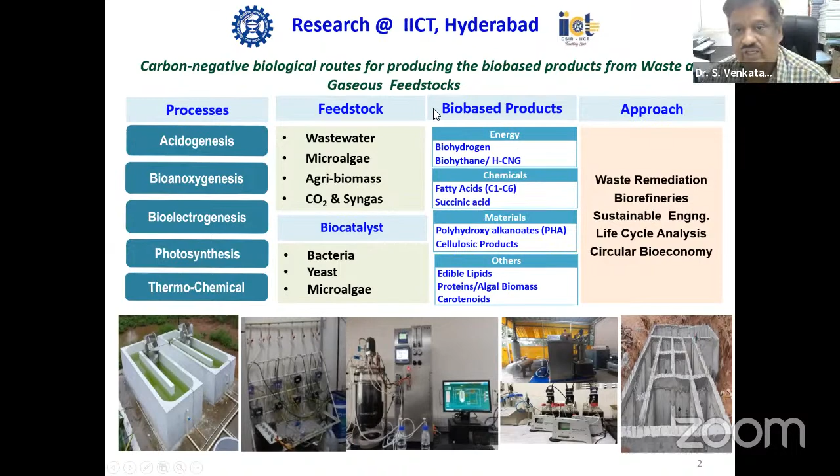We look into circular bioeconomy as an enabler by taking support from life cycle analysis as well as developing biorefineries, which are some of the things I would like to explain in this presentation. So this is the overview of my presentation.

I would like to speak on climate change, why climate change needs to be considered very seriously. I'll try to discuss fossils versus circular economy, which is again a very important entity that needs to be infused into the economic system, and discuss nature-based solutions, why we have to use nature-based solutions for sustainable development, and a few examples which we are doing in IICT. And finally, I would like to conclude by showing some of the models which we have developed and the models which can be taken up for development in future.

As far as the global energy mix is concerned, mostly we are going with fossil-based feedstock for energy requirements. Only near to 15 to 20% is from renewable resources. Mostly it's from coal, oil, gas, a little bit from nuclear, and a little more from hydropower. When we look into the Indian context, India is the world's third largest consumer of energy, as well as the third largest producer of renewable energy. Especially our solar and wind power has increased significantly in recent times, when we look into the MNRE report. However, we still have a lot of potential to move towards something sustainable by using bioresources.

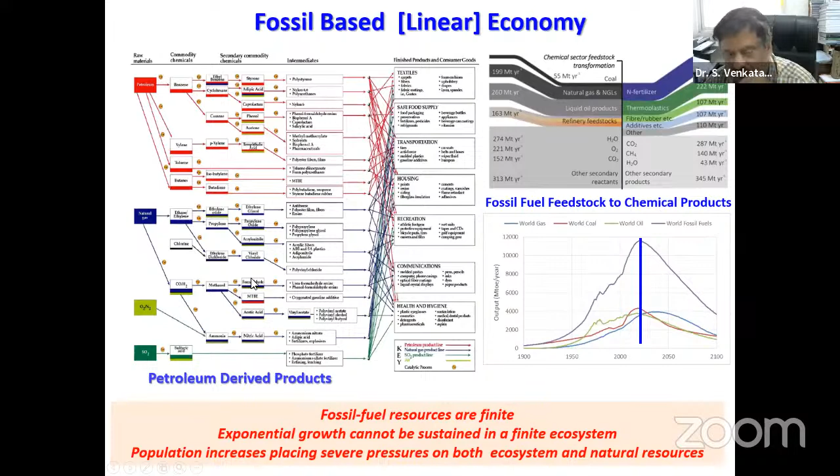Coming to CO2 emissions, which are very specific to climate change, globally near to 36 gigatons are being produced every year. These are 2021 figures, and India is the third largest emitter, again because of our use of fossils, accounting for near to 3 gigatons of CO2. So this is also a very critical thing. CO2 at a gigaton scale is accumulating in the environment mostly because of using fossils and other practices which are not sustainable.

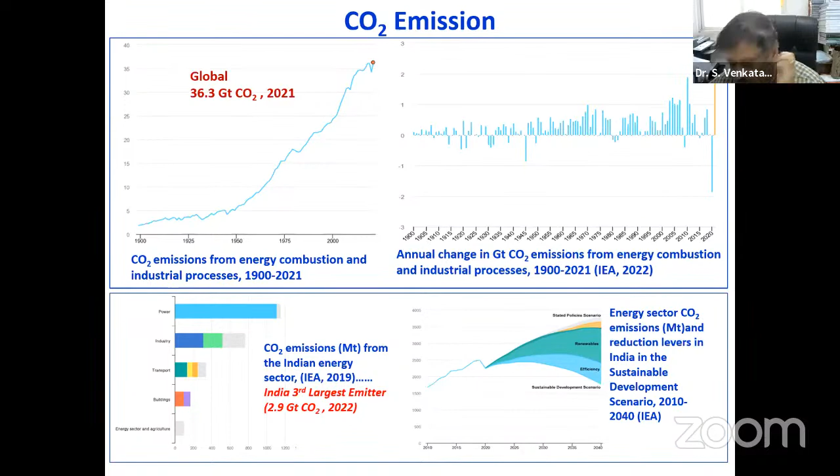Here I would like to speak a couple of minutes on Earth Overshoot Day. Many of you might know about Earth Overshoot Day, which is given every year by the overshootday organization, which represents the world biocapacity that can regenerate, divided by the world ecological footprint, times 365 days.

So now it is about the 2022 figures. The 2023 figures still have to come out, 18th July. So we required 1.75 years to regenerate back the activities we have done based on the biocapacity of the existing Earth. So if we go in a similar way, without changing, we require near to 2.75 times of Earth to regenerate back whatever activities we are doing by 2050.

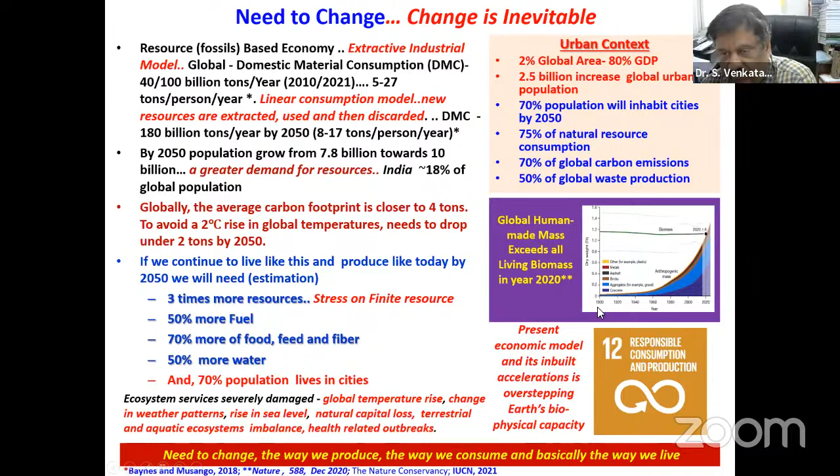As per Sustainable Development Goal 12, responsible consumption and production is a very important thing which we need to take up. We have a lot of challenges while moving towards sustainability. However, apart from challenges, we also have opportunities in decarbonizing, augmenting energy efficiency, waste handling by CCU, shifting from linear to circular economy, and adapting nature-based solutions. All these attribute to sustainability, which we take into account while designing any activity we are going to do in future.

So here a couple of slides I would like to mention, as I have already discussed linear economy. Ours is a fossil-based linear economy, which we can call cradle to grave or extractive industrial model. We are taking material from Mother Earth, that's the cradle, and after use, even though it has value, we are sending it to the grave. So we are wasting the functionality of the material.

So this we are practicing for nearly the last 200 years with a take, make, use, and dispose approach, which is the reason for many of the environmental damages which are happening. So a lot of pollution and climate change can be attributed to a kind of linear economy. So we have to move towards something sustainable.

And recently you might be knowing that nature-based climate solutions are being addressed in a significant way, as per the 6th assessment report, AR6, the IPCC released. They attributed all the climate change issues to anthropogenic activities. So to move towards something sustainable, we have to adopt circular economies, which is important.

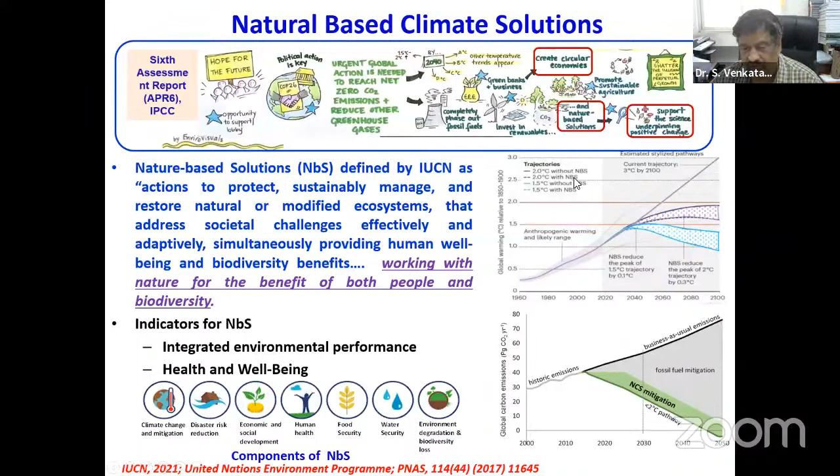So one of the nature-based solutions or strategies which the IPCC has suggested is circular economy. Moving from linear to circular economy is one of the sustainable strategies which needs to be practiced, and we can say this is a cradle to cradle model, not a cradle to grave model, and also a regenerative approach.

So whatever material we are taking from Mother Earth is a raw material which will be used in a process, and the output from this process as a waste should be designed in a way that it will be a feedstock for another process. Likewise, we can improve material efficiency by going with circular economy and reduce the emissions to the environment.

So these kinds of circular approaches are now being talked about much, particularly in the European Union, because they don't have many resources. And there is the Ellen MacArthur Foundation, which is propagating circular economy in a very big way, wherein they have given 3 principles. Design out waste and pollution, which is very important.

So whatever material we are designing should be designed so that it is not a waste at the end of its life. It should be a feedstock for another process, a kind of industrial symbiosis model. And keep products and material in use: as much as possible, the material should be in circulation so that it will not go as a waste. And most important, again attributing to nature-based climate solutions, regenerate natural systems. So we have to adopt something related to nature-based solutions, which is again a regenerative approach.

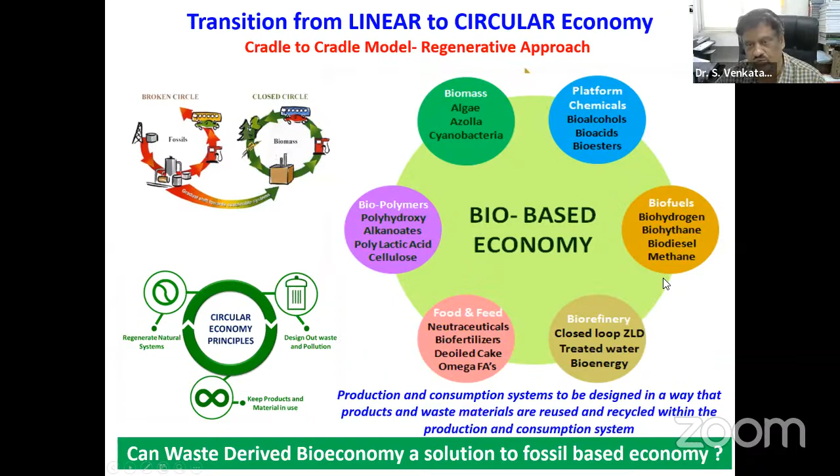So one of the strategies is moving towards a circular bioeconomy, adopting biological routes that will have a good amount of sustainability, which I will discuss in subsequent slides. So this is a kind of regenerative approach. And we'll have all kinds of sustainability, green economy, low carbon economy, circular economy, wherein if we adopt a bio-based economy, we can go with a sustainable economy. This will advocate low carbon economies and all kinds of sustainability, which we will discuss in subsequent slides.

So here, when we talk about any kind of circular economy or linear economy, waste is an important component. The basic principle of circular economy is to use waste as a resource so that material should not come out of the system as a waste that will have long-term consequences for environmental services, basically.

So in the Indian context, everybody knows that we have 4 different kinds of waste, starting from municipal solid waste, which is huge in quantity, and more than 50% is biogenic in nature, and very little is being recycled at present. Apart from that, we have a huge amount of sewage being generated every day, which also contains a good amount of nutrients which can be recovered back.

And one more thing which is not much dealt with is fecal sludge, which is high in concentration of nutrients as well as carbon source. However, this is not being considered much, but the Melinda Gates Foundation is looking into Indian fecal sludge as a very big resource. Apart from that, we have a good amount of industrial wastewater, which also contains good resources.

The one thing which needs to be understood here is there is no dearth of material like fossils, because every year there is an increment of 10% in solid waste generation. So material is there. We have to design how this material should be used as a feedstock for our material requirement. So here, when we have wastewater, basically wastewater needs to be treated before its disposal.

That's a regulatory requirement. So they basically prefer biological process, because biological process will not generate anything hazardous. So biological treatment has two classifications: aerobic and anaerobic.

Aerobic process uses a lot of oxygen, so that new cell will be formed and carbon will be converted to CO2 and H2O through the TCA cycle. So it's an energy intensive process, even though it's very effective.

Alternatively, we have anaerobic process, which is an energy giving, reducing process, functioning in absence of oxygen. Everybody knows methanogenesis, the gobar gas plants, which has been extensively used in the last 100 years to produce methane from animal waste or other domestic wastewater. That methane is one of the important energy sources being considered at present.

However, we can also treat this process differently. We can produce hydrogen as a terminal product, or by putting an electrode assembly, through bacterial function, we can produce bioelectricity using electrode as terminal electron acceptor. Or bacteria under anoxic conditions can convert waste carbon into polyhydroxyalkanoate, a kind of biopolymer, or into solvents.

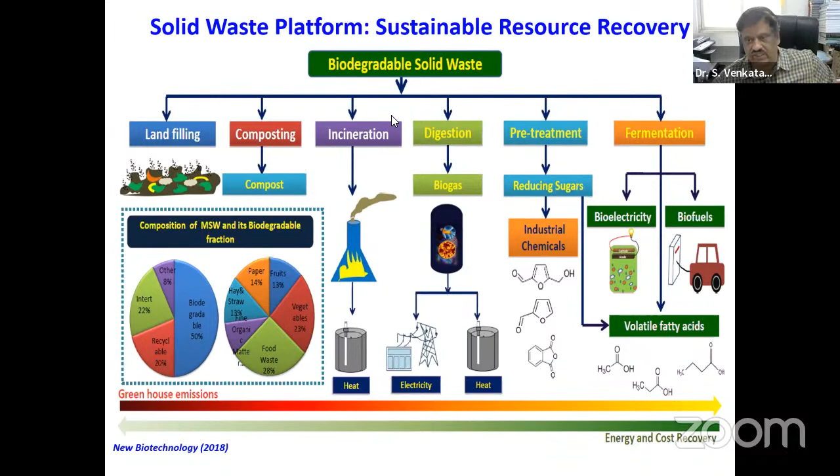Basically, there are chemical processes which I am not going to discuss, but we are interested in biological process. As you know, algae and plants are known for capturing CO2 and converting it into oxygen, apart from food products or other products, which is very much required for human or animal populations on earth.

Apart from that, by using a specific kind of bacteria, we can also rapidly convert CO2 to some platform chemicals. So this is one domain which is coming up right now.

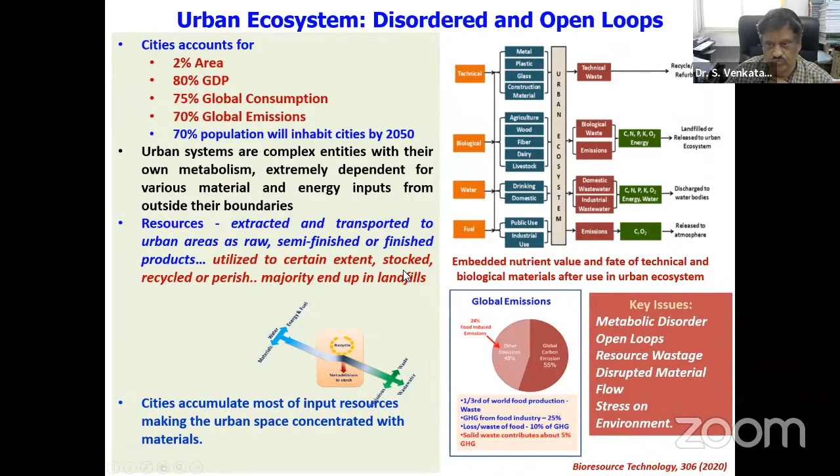Here, a couple of slides I would like to show on urban ecosystems, which are concentrated packets, as we discussed earlier. Material is coming into the concentrated 2% of area, and that will be used, a little bit will be recycled, but mostly it will go as waste in landfills. So this is not sustainable, and we have to design something sustainable here also.

So to consolidate here, I would like to show this slide wherein we can take any kind of waste - domestic waste, industrial wastewater, solid waste, or gaseous emission. We have bioprocess or hybrid process integrated with chemical routes. Conventionally, anaerobic digestion is a more mature process at present with TRL 8 level, which can produce methane.

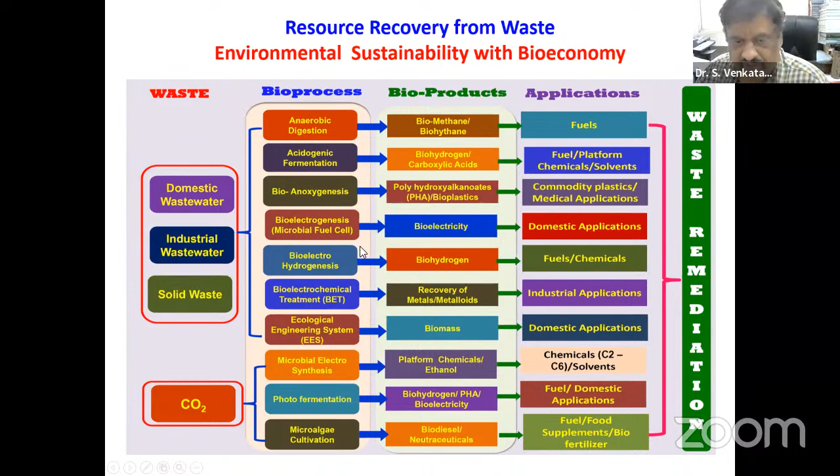Apart from that, there are many processes being studied at different scales, wherein microalgae cultivation is already at commercial level, which can produce materials I've shown in the earlier slide, having a lot of application potential apart from waste elimination. By this way, we can achieve environmental sustainability and also address bioeconomy, which is very much important for a resilient ecosystem. To do all this, as I told, waste biorefining requires bioprocess.

So here at IICT we're trying to look into some of the processes, which I will go through very briefly in another 5 minutes. So here, this is the slide I would like to show.

So here we started with biohydrogen way back in 2005. Our scope is to use waste as a feedstock and try to produce hydrogen, which is green in nature.

When we discuss biohydrogen, there are two routes. One is thermochemical, where when we use biomass, that hydrogen produced we can call biohydrogen. Or through pure biological process, there are two types. One is anaerobic process, which is a dark fermentation process, a matured process at present. Apart from that, we have photobiological process, depending on photosynthesis, again classified into three processes: light fermentation, direct photolysis, indirect photolysis, which produce more hydrogen theoretically compared to dark fermentation.

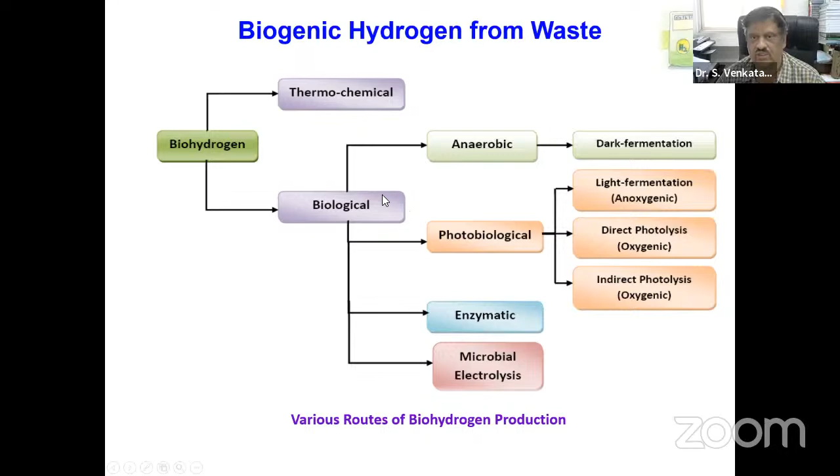Just going to brief: when we have wastewater or waste which contains 1 kg of COD, representing organic carbon, we can nearly produce 468 liters of hydrogen. This is the theoretical view. When we look into glucose terms, 1 mole of glucose can produce 4 moles of hydrogen apart from 2 moles of acetic acid. Or 1 mole of glucose can produce 2 moles of hydrogen or 1 mole of butyric acid. It's a mixed fermentation.

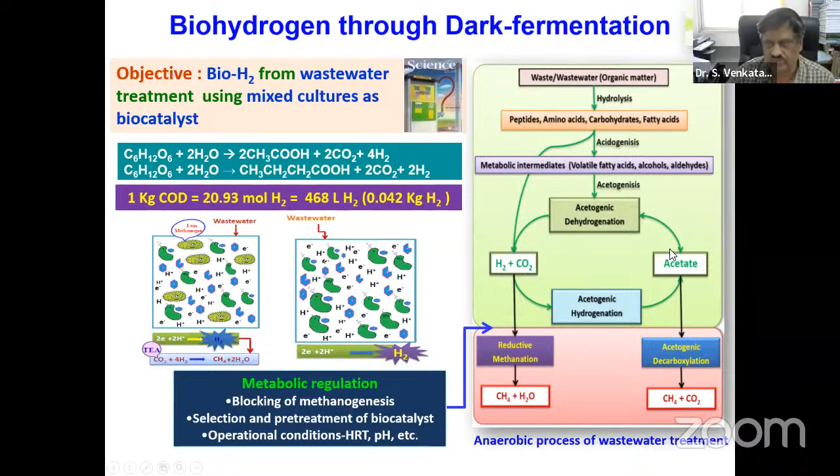Basically we have 4 steps where you can see hydrolysis, acidogenesis, acetogenesis, as well as methanogenesis. So the whole process, we have to stop at acidogenesis in order to make hydrogen the terminal end product. This is where success came for us when we used mixed culture - we are able to suppress methanogen activity here.

So we started working with different wastewaters, able to get a good amount of hydrogen with good wastewater removal efficiency in terms of COD. However, we have developed a selective enrichment strategy of hydrogen producing bacteria by using some classic microbiology methods.

We took the shock treatment kind of approach, wherein the spore forming bacteria, which are hydrogen producers, will go into spores. But methanogenic bacteria are very sensitive - with shock loads they will get killed. So we try to use this strategy and are able to take the acidogenic bacteria into spores, and in parallel methanogenic bacteria get killed. After that, we regenerate and activate the acidogenic bacteria.

This strategy helped us, and we are able to produce incremental hydrogen compared to the mixed culture which has methanogenic bacteria. You can see 17% fold increment when we compare with the control. The cyclic voltammetry curves were also very significantly different compared to the blank operation.

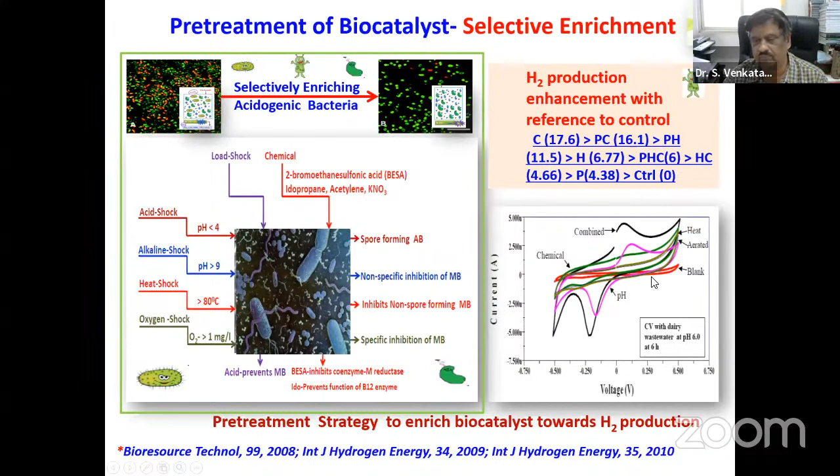So this is the diversity of the bacteria. When we look, Firmicutes are the known hydrogen producers, which contribute to hydrogen production in the acidogenic reactor. Even when we operated systems for nearly 1,400 days, we are able to sustain the culture which has dominant Firmicutes. So these are different bioreactors which we started and optimized at pilot scale.

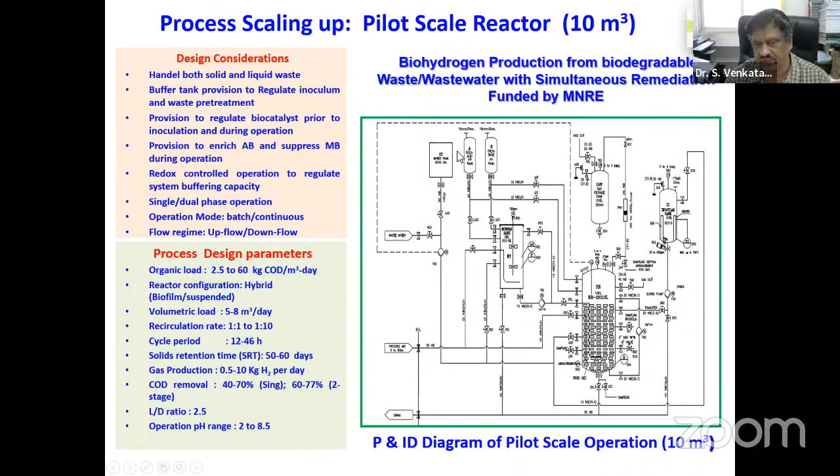And based on that, with funding from the Ministry of New and Renewable Energy, we are able to set up a pilot plant with 10 meter cube capacity. This is the P&ID diagram, wherein different unit operations are there, along with the main hydrogen reactor, biofilm system. This is the photographs of different unit operations.

Here we try to use municipal waste, food waste, and produce 50,000 liters of hydrogen with 50% conversion efficiency, apart from fatty acids.

This has given us some leads to go towards a technically and economically feasible strategy.

So to increase hydrogen production and reduce the cost of hydrogen, we try to valorize it. Once we produce hydrogen, the outlet will contain a lot of carbon that can be reused. We cannot throw it away as waste, so we are trying to reuse the carbon coming from the hydrogen reactor through different integrated strategies.

This is a kind of biorefinery. We can use it for organic farming because of phosphate solubilizing capability, or with mixotrophic algal cultivation we can produce biomass and biodiesel, or with a bacteria SBR kind of system we can produce plastic, or by integrating with a conventional anaerobic process we can produce methane, or with electrolysis additional hydrogen, or photofermentation for additional hydrogen, or MFC for electricity. This kind of integration increases resource efficiency, going towards a refinery.

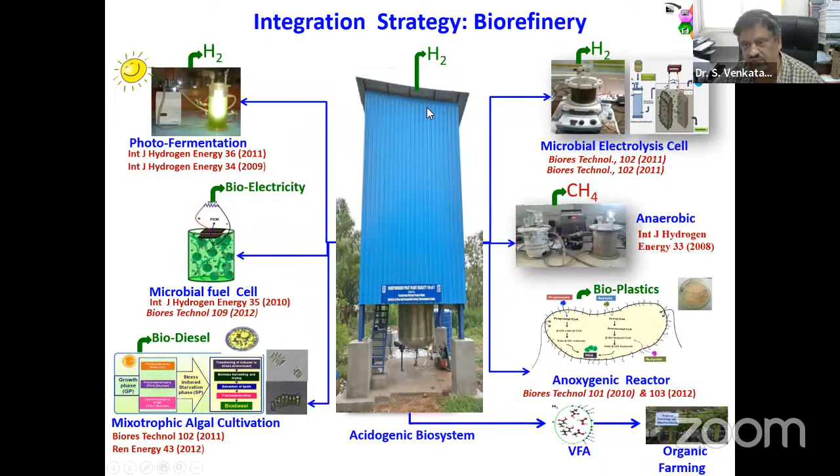That is a circular kind of approach, so there is no need to waste any resource. We'll be getting two products: either one or two forms of energy, or one energy with one material. This is something we are working on significantly.

We are also focusing on HCNG, where government guidelines specify using 18% hydrogen in compressed natural gas as HCNG. By integrating this strategy, we'll be able to produce HCNG itself without getting hydrogen from some other source.

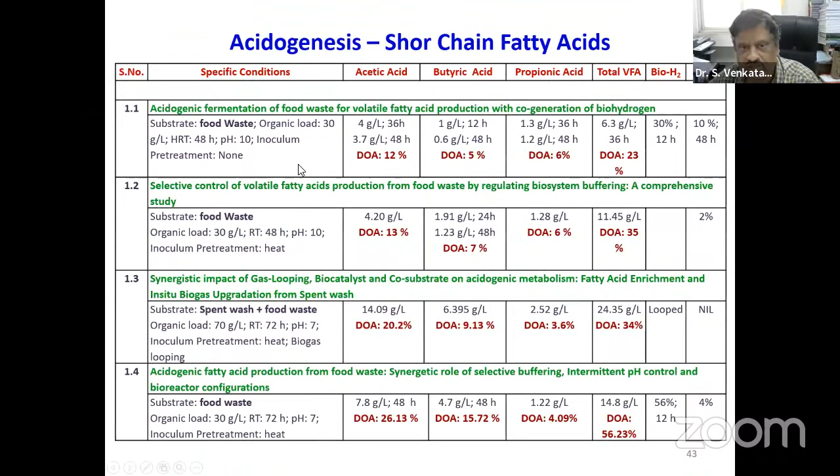Likewise, we are looking into increasing productivity, increasing resource recovery, and reducing the cost of hydrogen production. We are focusing on this but won't go into deep detail due to shortage of time. There are two processes I would like to mention.

When we look into the hydrogen process, people asked us about safety issues and separation, because along with hydrogen there will be CO2, which needs to be separated before use.

So we started looking into a kind of microbial fuel cell where the same bacteria will be used, but separated by a proton exchange membrane, putting in electrodes - cathode and anode - and connecting them to a resistance. The bacteria release proton and electron along with CO2; the electron goes through the anode, through the resistance, and enters the cathode, while the proton goes through the proton exchange membrane and enters the cathode chamber.

In the presence of oxygen, it converts to H2O. Because of that, there is electron mobility through the resistance, and because of that, cell EMF is formed, which is nothing but energy in the form of bioelectricity.

One mole of glucose can produce 24 electrons and 24 protons. In wastewater terms, for 1 kg of COD removed, we can produce 170 watts of energy. This is one of the different ways we have used to produce energy, and it's comparatively very good in terms of COD removal efficiency compared to hydrogen.

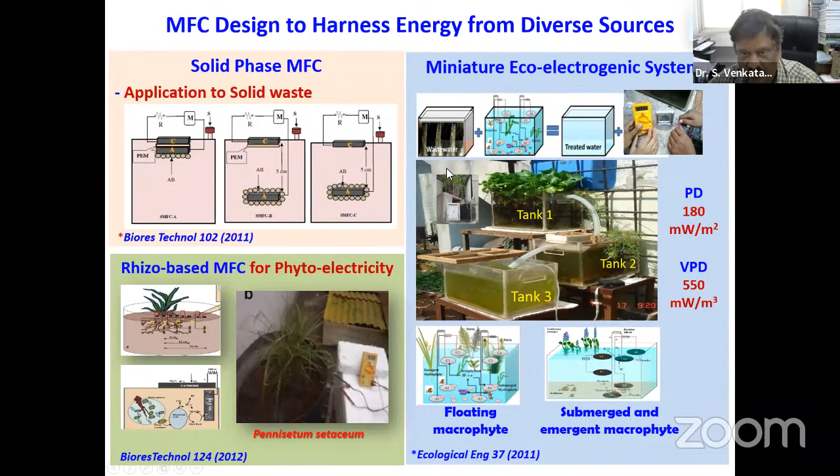There are different things related to this, but I will not discuss them now due to lack of time. There are other applications here I would like to mention, not only for power production.

This MFC, which I'd like to call a microbial electrochemical system, can do multiple things - with domestic wastewater or any kind of wastewater including CO2, it can produce power as MFC, or treat wastewater very efficiently with bioelectrochemical treatment using the same principle, or recover CO2 and convert it into chemicals, or remove salts. It's a very versatile and emerging technology that needs to be significantly pursued.

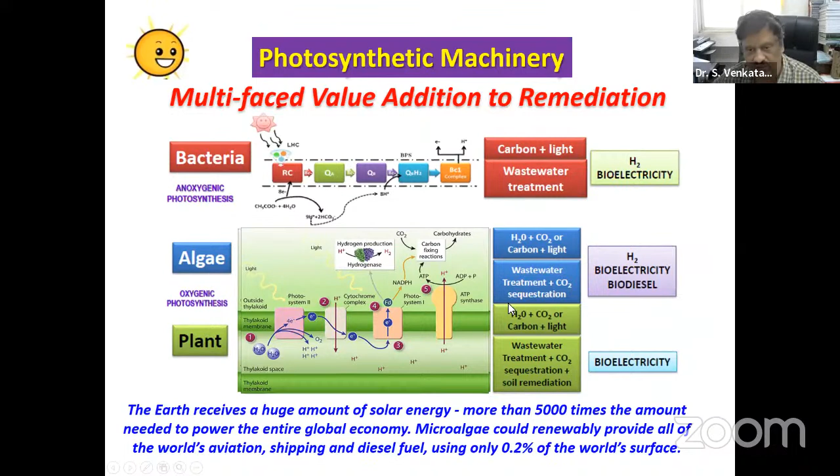There are multiple applications, but I will not go into them here. The last process is photosynthesis, which everybody knows we are dependent on for all our activities, either to produce oxygen or food, using photosynthetic bacteria or microalgal plants.

So we try to use this as a mixotrophic cultivation terminal point. These are the raceway ponds which we are doing. I would like to explain the waste biorefinery closed loop, which we have scaled up.

Here we try to integrate all biological processes, where we take wastewater or waste. If taking waste, we have to pre-treat it a little bit, and then it enters into a microbial fuel cell setup, where it reduces the complexity of the waste and produces electricity.

And then the outlet from this first unit operation will go to the main reactor, the acidogenic reactor, where most of the carbon will be reduced and hydrogen will be produced. And the residual carbon will go for any of this process and produce a third form of fuel or material. So a 3-stage integration, 3 forms of products, 90% of carbon recovery, and the residual will go for wetland systems.

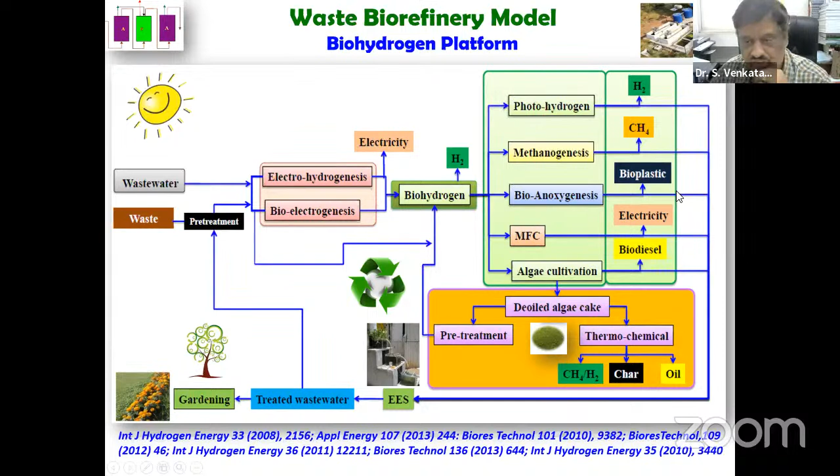The water can be reused here if we are using waste for pre-treatment, or again for garden. So we are trying to close the loop, trying to recover as much as possible. So this is the 10 meter cube biorefinery system, which we have integrated with hydrogen, a closer view of different unit operations. So other data which we have generated, but based on this, we are now setting up a demonstrative plant

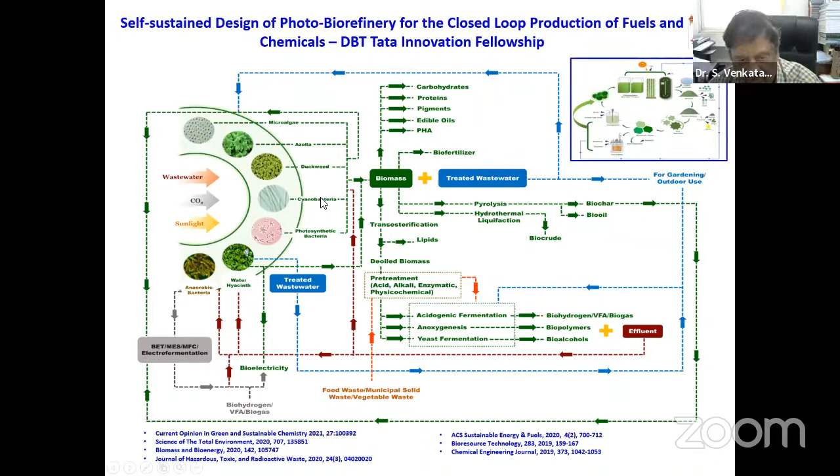for hydrogen, 150 kiloliters of clean hydrogen with 3 modules: a biological module, a separation module for CO2 and H2, and a separation module for fatty acids, so that a closed loop approach can be done. This is being funded by DBT. Likewise, there are many models, particularly when waste is considered, we can develop, but because of lack of time, I'm not explaining. But there are many models which one can take up and make the process sustainable.

And at the end, I would like to show this slide. Whatever materials we are taking from fossils, we can produce by this kind of approach, by using waste as a feedstock. All materials can be produced. By this way, we can reduce utility of finite resources, apart from reducing environmental emissions because of using the waste resources to produce products. So there is huge opportunity and it also supports many of the sustainable development goals, but it needs interdisciplinary research significantly.

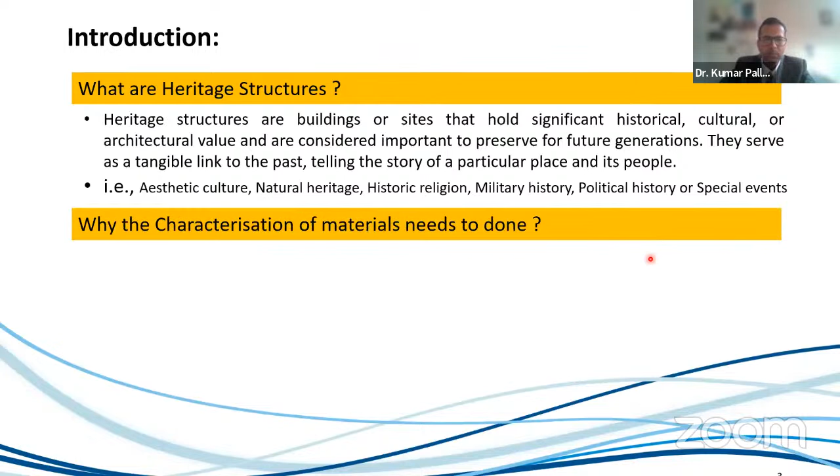The second question we should ask is why the characterization of material needs to be done. Characterization of material is crucial for heritage structures because it helps us understand the composition, condition and behavior of the material used in the original construction. This information will definitely help in developing appropriate restoration and conservation strategies that preserve the heritage structure's historical and cultural values.

And by analyzing the material, we can determine the best method for cleaning, repairing, and protecting the structures while maintaining their authenticity. Additionally, this information can be used to develop a long-term maintenance plan that will ensure the structure's continued preservation for future generations. And further, analyzing the original cementing material can help to achieve compatible and long-term restoration of heritage buildings.

And the next question, how can we do that? Basically, designing heritage mortar is quite a meticulous process. We need to look at the aesthetic, physical, chemical, mineralogical, and mechanical properties of the original mortar, with consideration of RILEM recommendations. The design involves analyzing samples of original mortar, determining its composition and characteristics, and then creating a custom mix that closely matches those properties using materials such as lime and sand.

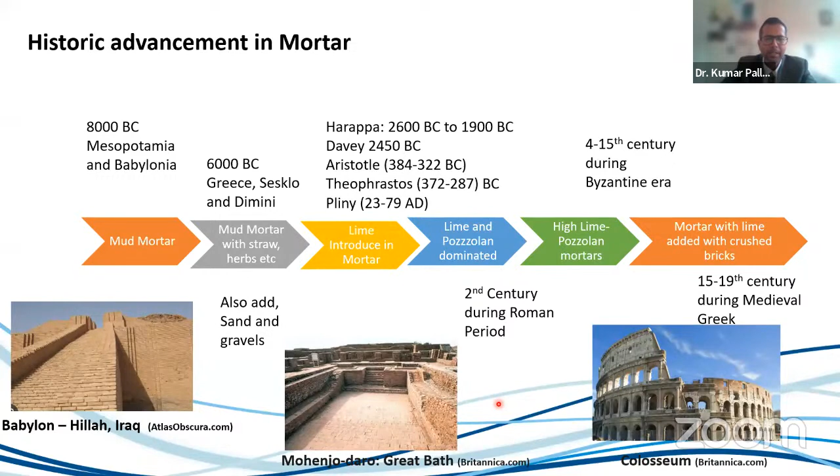But the good thing about these mortars is that they have very nice properties compared to our PPC. They can breathe; they can absorb water nicely during moist conditions, and they can release it as well. Those properties definitely make these structures survive so long.

So if we look at the problems with heritage structures, I'm showing Robben Island, which is one of the 10 UNESCO World Heritage Sites in South Africa. This justifies the need for regular and proper maintenance of this site, and it represents South Africa and its history both locally and abroad.

Moisture movement problems are also seen, as they tried to repair with PPC, and the PPC restricted the movement of moisture through the structures, which further deteriorated their condition. Water logging is also one of the major issues, as it is surrounded all around by the sea. And because of that excessive water logging, there is excessive mold growth in those structures.

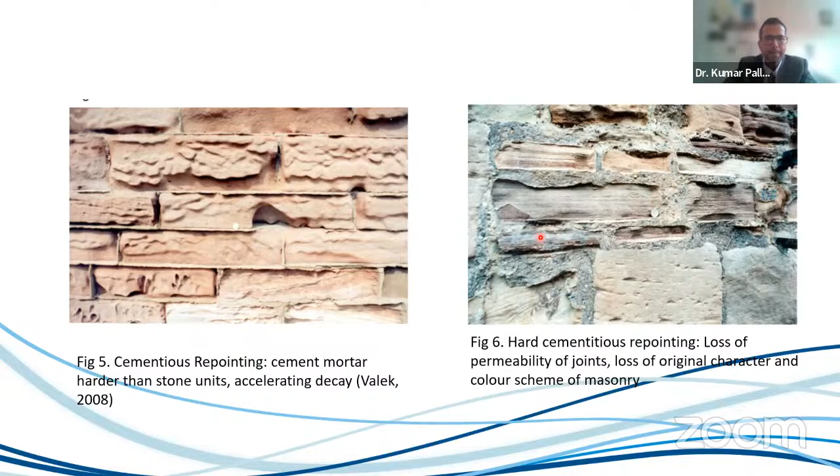So what has happened after the repair work, this mortar which they tried to use to restore it started coming or falling out of it, because these structures were definitely built with lime and sand mortar, and they try to breathe during the rainy seasons whenever there is moisture, and even in the dry season they take the moisture out from them into the air.

And once they repaired with the PPC, this entire process of the structure has been stopped, and that causes immense damage. Instead of restoring them, it causes immense damage to them. So the cause of degradation is compatibility. That is what I have shown.

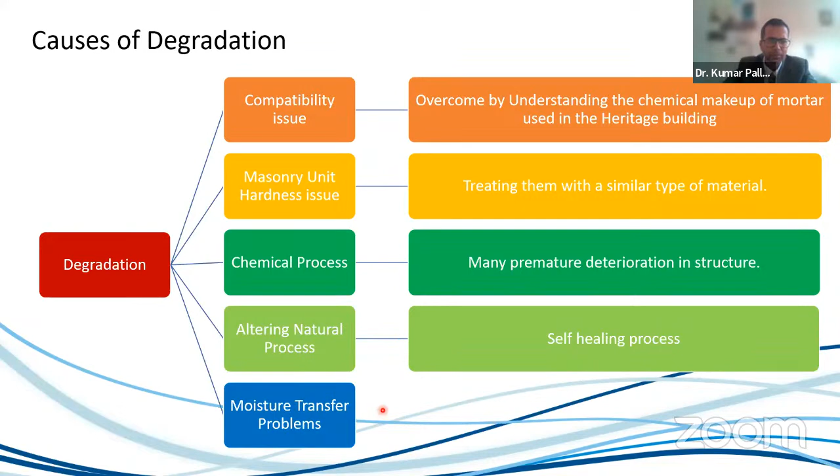And then the moisture transfer problem: they are not able to breathe, their moisture is not able to get out of the structures, and that creates a problem in these structures. I'm just showing this for your understanding of what the major causes in masonry are, and how the expansion, swelling and loss of strength occur.

in 2003. It shows that it may be caused by the presence of sulfate in the masonry, the presence of calcium aluminates in the repair mortar, and the presence of moisture in the masonry. Further, if we talk about thaumasite, it occurs under the following conditions: in the presence of sulfate in the masonry.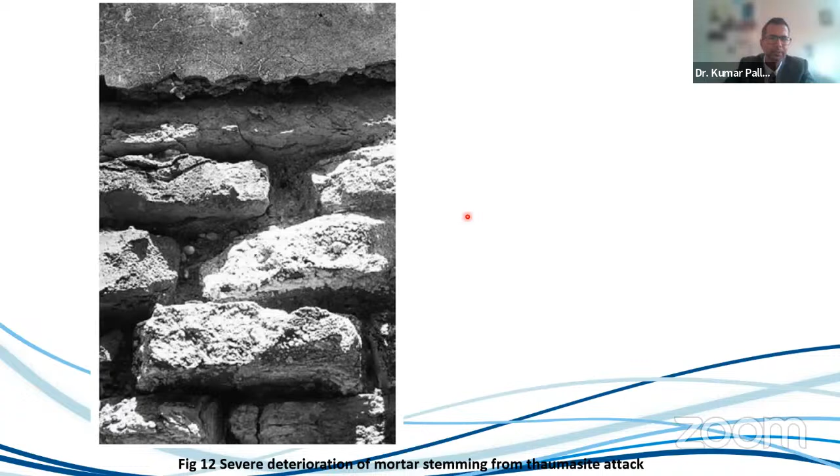causes in these structures. So for the prevention, basically, the surface can be treated with hydrophobic products such as silane to hinder rainwater absorption, and metallic or polymeric sheets can be inserted into the wall at ground level to block the capillary rise of the water. So there are several prevention techniques which can be used. I'm just giving you the insight in order to understand what other ways we can use to protect these heritage sites.

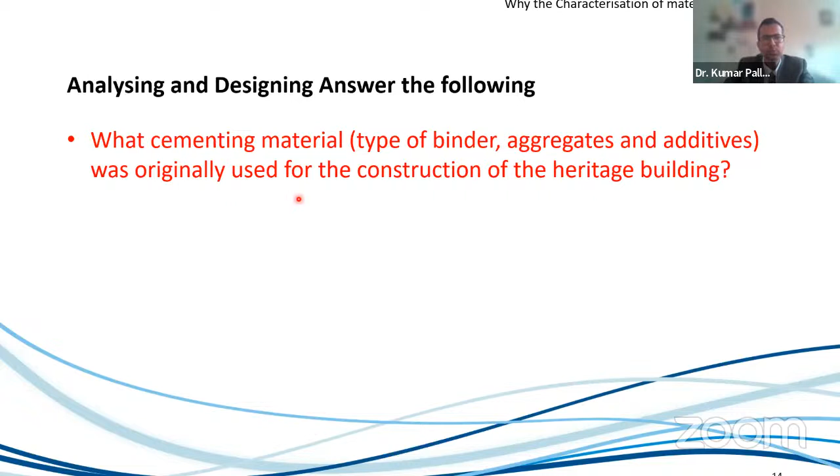So here I'm just going to show you our case study, which we did for the Castle of Good Hope and Robben Island, in which it answered the following questions: what cementing material and type of binder, aggregate, and additives were originally used for the construction of the heritage building. Further, the characterization process assists with the design of replica material, which is our current project in collaboration with a government agency, the South African Heritage Resources Agency.

And even Hughes et al. in 2013 mentioned that it is important to characterize not only the historic building material, but also modern material prior to restoration work. So it is like a sort of generation of a catalog for each era's buildings, which helps us to understand how to restore these buildings once we are 10 years ahead, and once something has happened to the building.

So the philosophy of authenticity is one of the most important words which we try to achieve while we are trying to restore these buildings. And it says that any intervention in the historic building should be guided by various principles. And the question why a monument is considered so important is usually related to its authenticity. So there is a general feeling that the authenticity of the architectural heritage should be understood and preserved as much as possible. The understanding of this authenticity is still much debated even after the Nara Document.

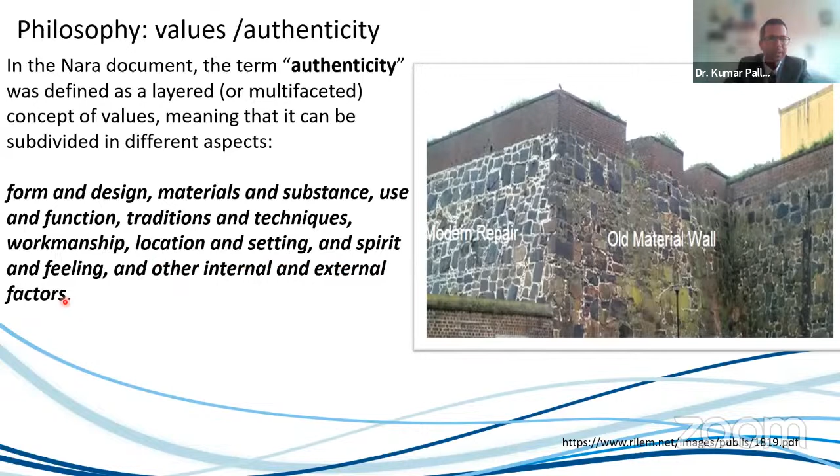So in 1994 they sat on this and discussed how authenticity should be defined for heritage. So form, design, material and substance, use and function, tradition and technique, workmanship, location and setting, spirit and feeling, and other internal and external factors should be accounted for. Each of these aspects can be looked at according to the various traditional dimensions, which are the traditional Western ways of looking at the values of architectural heritage: artistic, historic, social, and scientific.

So in the next slide, I would like to say in what way we need to see the characterization chart. If we talk about the aesthetic, this is quite important in terms of heritage structures. We need to match the compatibility of the material in terms of visual, color, texture, and surface finish. Physical is definitely an indicator of the mortar engineering properties, and it's related to the mechanical properties. So whatever material you are going to use for the restoration, its physical properties will reflect its strength and stiffness.

If we talk about the mineralogical characterization, it helps us to understand how the surrounding environment behaves with the materials, and that is quite important. So if you are close to a saline soil environment, or in a different set of environment, you need to understand what sort of material you need to use for those purposes. Chemical composition helps us to understand in what ratio we should apply what components or elements are used in this material.

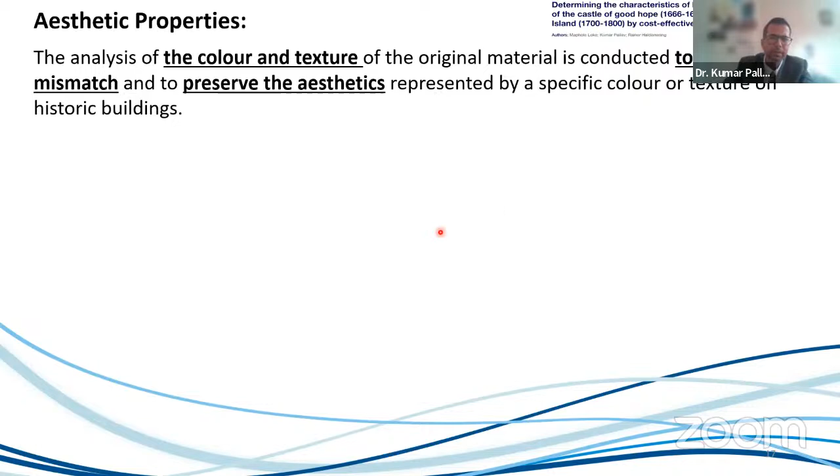So all these characterizations have been performed except mechanical in the present work, but we also did the mechanical characterization recently, and we will include it in our development phase of the work. So for the aesthetic property, this work has already been published in a peer-reviewed journal, that is the South African Journal of Archaeological Studies.

And if we go with the aesthetic properties, all our tests we classified into these six zones, and that is time taken for the test, the cost, availability of testing equipment within current research, the quantity of the material required for the test, technical data quality, ability of method. So definitely whenever you take up certain research, you need to look for your resources,

and we try to develop whatever methodology we are using here for the people in the field, so that they can use an economical way to classify or characterize this material. So for the aesthetic, we use color test and colorimeter, and this is what we haven't used, sorry, and now we have used recently in collaboration with the University of Granada,

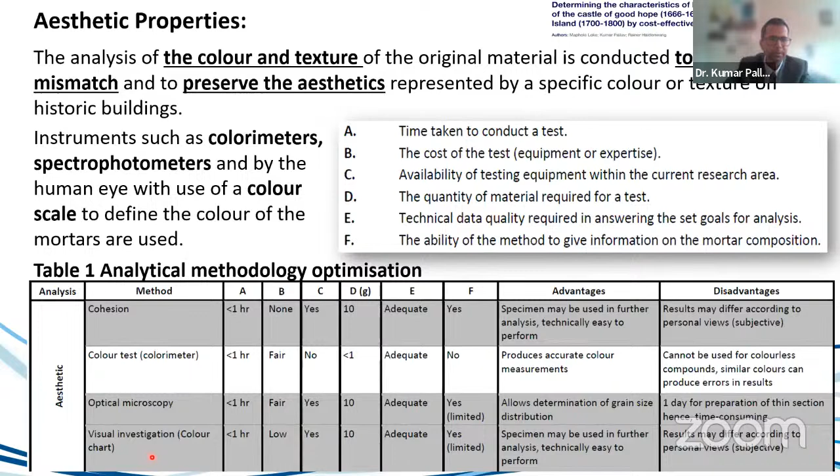and this time we also classified the color test, and we initially did cohesion, optical microscope, and visual investigation on this particular work. So these are the samples, and we try to classify all these samples with their ages, what are the sample types, and we describe them based on our visual or you can say aesthetic appearance. And we also see how cohesion is there, and we just try to describe what we have seen in our visual inspection.

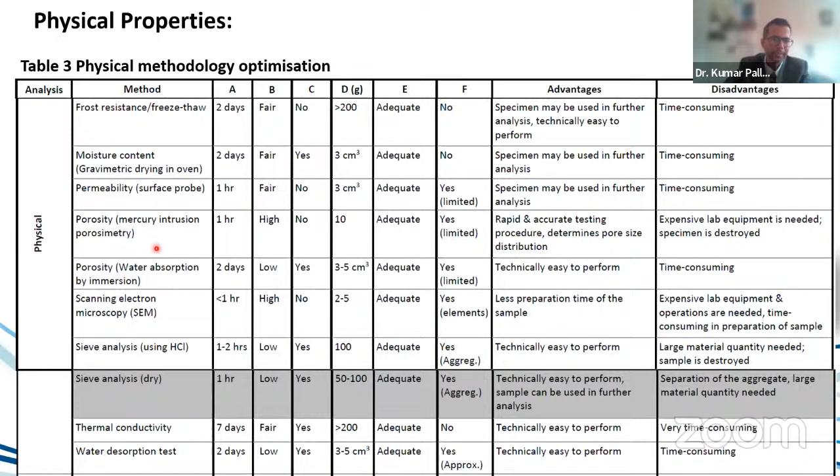Further, for the physical properties, we only perform sieve analysis, but this time we also did a porosity based on the, you can say, development phase. We try to look at other physical parameters for the material. So we did it for all those samples, and I will show you how we try to incorporate them in developing our primary material card.

So we also carried out the mineralogical properties, as we want to see how this mortar behaves with the surroundings, and we use a very simplified test, which is nothing but your titration test, which you already learned in grade 11, 12. So that test is used to see what minerals are present in the samples, and with all these samples we see sulfates, which is +++ in SK1 sample, and nitrates, if you see, it's absent.

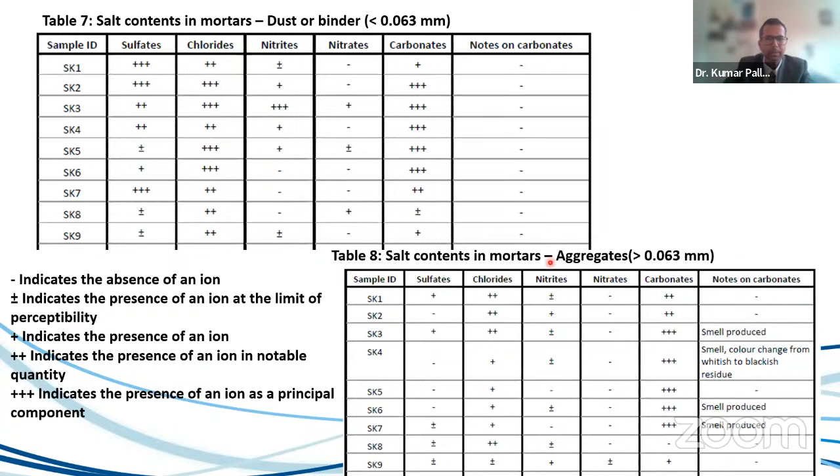So all these indicators are presented here in order to understand how much of these minerals are present in the dust of the binders. Similarly, we also see these minerals in the aggregate. And we also went for the chemical properties. We got B/A ratios for this, and we try to get the cementation and hydraulicity of this historic mortar, which is like, if we talk about this,

as these are made of typical lime, sand, and water, sometimes including additional materials such as crushed brick and potteries. So over time, these mortars undergo a process of cementation, where the lime reacts with the atmospheric carbon dioxide to form calcium carbonate. And this process gradually increases the hardness and durability of the mortar. And another important factor in the performance of historic mortar is hydraulicity, which refers to their ability to harden in presence of water.

So some hydraulic mortars contain hydraulic components such as volcanic ash or brick dust, which provide additional strength and resistance to water damage. So understanding of the cementation and hydraulicity status of historic mortar is essential in conservation and preservation. And it also influences the choice of materials used as well as techniques, right?

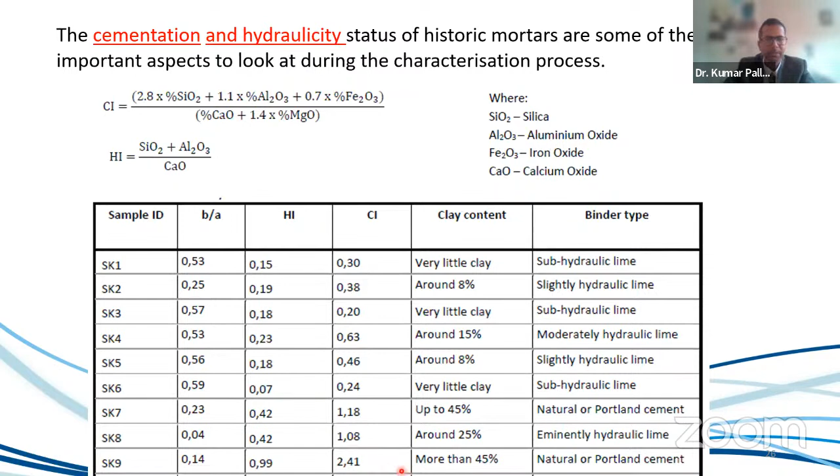So if you see for SK1 to SK9, with the higher CI index, it is close to your Portland cement, and in those locations like SK7, they have used Portland cement for the restoration work. And even for the SK9 location, they have used this Portland cement. So we develop a PMC card, and we try to recommend it for most of the sites in the South African context.

We are doing that project for various heritage sites, so that they have these PMC cards with them in order to define its binder, aggregate, and additives, B/A ratios, soluble salts, colors, and whatever notes you have to do. This is my student's work. She worked on a master's dissertation, and now she is doing doctoral work in collaboration with the University of Granada. So she has now tried to develop this mortar for the two sites.

This is the current work which we are doing right now. So we started design and development of this. So this is phase one. We try to do more detailed investigation of the characteristics of the mortar. And then in phase 2A, we are making those mortars, and we try to develop them in conjunction with the phase 1 studies, and we will look for the compatibility, durability, and its physical, chemical, and mineralogical aspects.

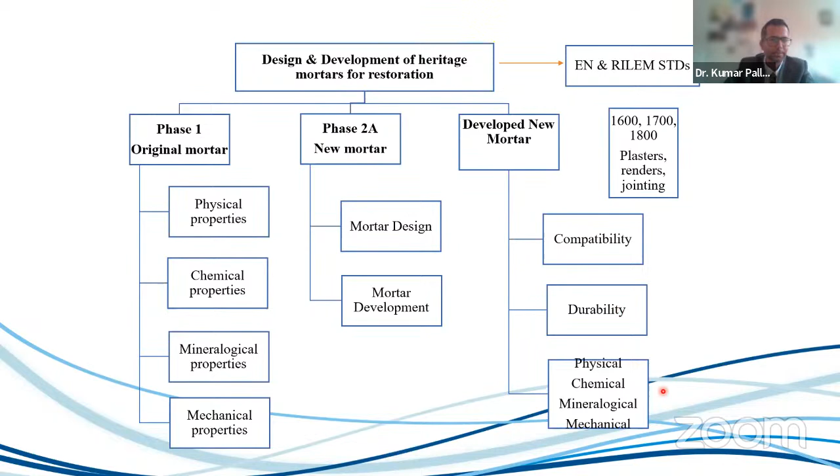In conclusion, I would like to state that the preservation of heritage structures is of great importance, and it is essential that they are conserved with the authenticity of the original material.

Further, it is necessary to prepare a catalog for materials used in different eras to ensure that any rehabilitation is carried out with complete certainty of the implication of the element introduced. A multidisciplinary approach is necessary for each case, as each case will be unique, so you need to research the materials and include all stakeholders into consideration.

Preparation of a primary material card for all important structures is quite crucial, and that will help engineers or consultants take proper measures in planning repair and maintenance work. Therefore, the preservation of heritage structures requires a collaborative effort from various fields to ensure they are conserved in their original glory for future generations.

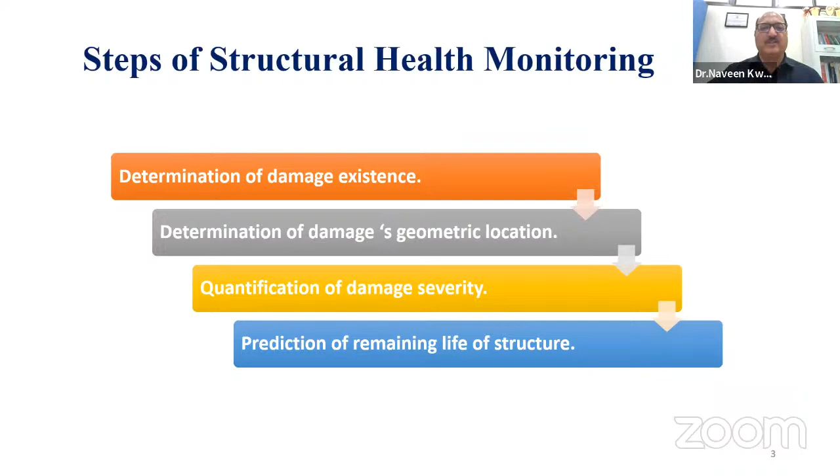If we talk about the techniques available for health monitoring, there are visual inspections and non-destructive evaluations. Acoustic emission is particularly one of the non-destructive evaluation methods. There are other non-destructive techniques also, like electrochemical, optical fiber sensors, ultrasonic guided waves. They all give us a lot of information regarding the health of the structure, but this talk is totally focused on acoustic emissions. So let us see what acoustic emission is.

The acoustic emission - the word acoustic is derived from the Greek word, and it basically means that we can hear. So whatsoever cracks or deterioration that are going to cause damage, that is in the form of acoustic waves or sound waves, you can say. Then we try to catch these sound waves and give the status of the health of the structure based upon the content of these acoustic waves.

So acoustic emission varies with the rate of structural deformation and can easily be detected by mounting sensors on the surface of a structure. And AE can efficiently prevent catastrophic failure in structures with hidden or unknown discontinuities. This point is very important - when a crack appears on the surface, it is visible to everyone, and anyone can say that damage has occurred in the structure. But cracks which are within the structure itself, which have not come up to the surface, can also be detected by this technique.

When a structure is exposed to an external stimulation of change in stress, load, pressure, or temperature, the localized damage source triggers the intense release of energy in the form of high frequency sound waves, and these waves propagate through the material and produce deformations. Waves are recorded by the sensor mounted on the surface, and these mechanical acoustic emissions are then converted into electrical acoustic signal, which are further converted into electronic data for the AE analysis.

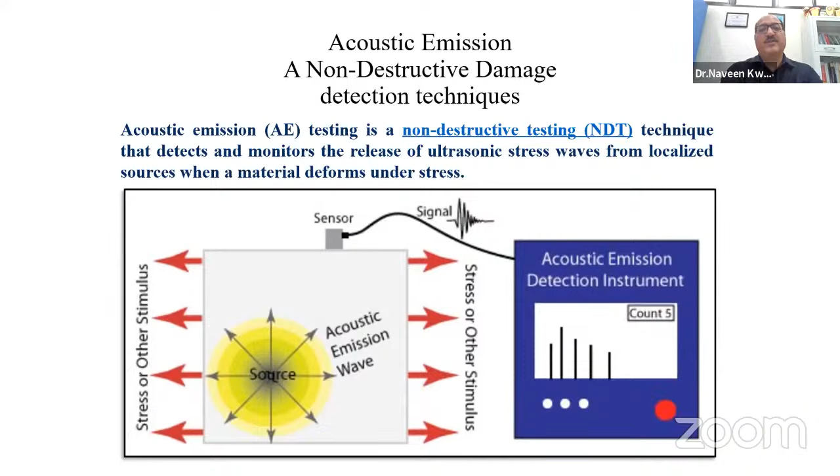So the acoustic emission testing is a non-destructive technique that detects and monitors the release of ultrasonic stress waves from a localized source when a material deforms under stress.

So how does it work? Basically, the acoustic emission testing works by mounting small sensors onto a component under test. The sensor converts the stress wave into electrical signal, which are received by the data system. These waves are generated due to an external stimulus such as high pressure, loads, or temperature.

As the damage grows, there is a greater release of energy, and the rate in which this acoustic emission is detected and the intensity of the acoustic emission energy parameters are monitored and used for assessing the structure integrity and for the health monitoring of the components.

So this is the way we basically perform the acoustic emission technique, and it's basically some sort of continuous monitoring system. It is not like an intermittent system where you go to a structure and put some sensor, get some data, and then you process it. It is not like that.

It is that in the acoustic emission technique, you permanently put the sensor on the structure, and you keep on recording the data as and when the distresses are generated in the structure, and then we process the data in the form that we have got from the AE sensors, and based upon the data obtained from the sensor, we try to simulate what kind of damage has occurred in the structure.

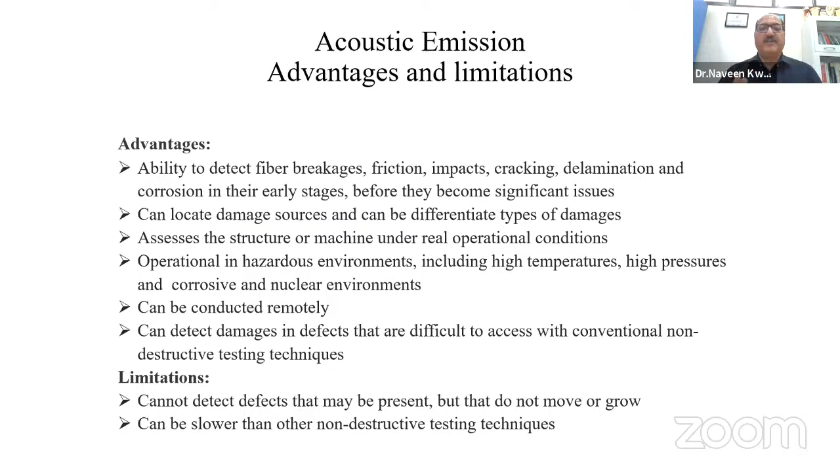So this can be applied to various areas, like structures, machines, and processes, for example concrete structures such as bridges and buildings. This can be used for metallic structures such as pressure vessels, composite structures like aircraft structures, motorsport structures, and it's very good for machines, like rotating machines and electric machinery.

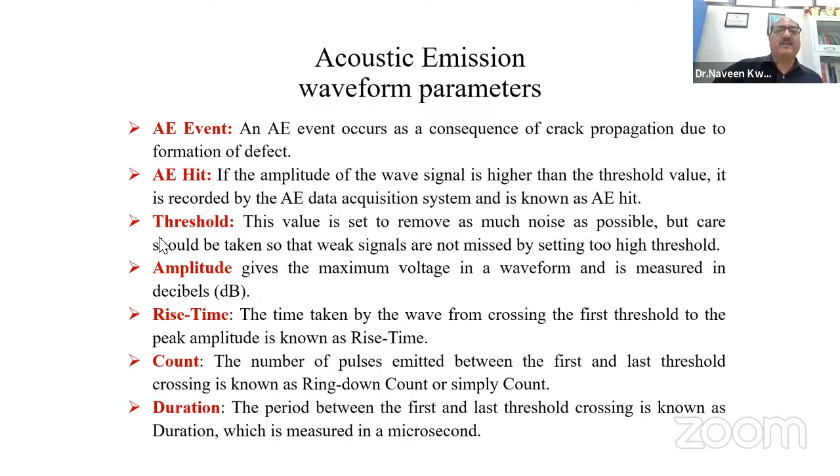Then the rise time is defined as the time through which the maximum peak occurs. And an AE event can be defined as an event that occurs corresponding to crack propagation due to the formation of a defect. I have already described these terms, so I'll move further.

So the majority of the signal processing in acoustic emission is governed by the attenuation, the background noise, and the frequency filters. The most important thing is the frequency filter. Frequency filters are used to eliminate the noise, because whenever we are getting a continuous signal, it is possible that we get some noise also. So we have to filter that noise. For that, we normally use a frequency filter in the range of 20 to 100 kHz for composites such as RCC structures.

So basically, as far as monitoring in acoustic emission is concerned, the most important point is the Kaiser effect. The Kaiser effect says that if in any process damage is occurring, let's say from A the emission is occurring, it has gone to C, gone to B, and then it is unloaded and comes to C, and then from C we again start loading the structure, it will go to D, then unloading it goes to E, and again on to F. So this is the process by which cyclic loading is normally applied.

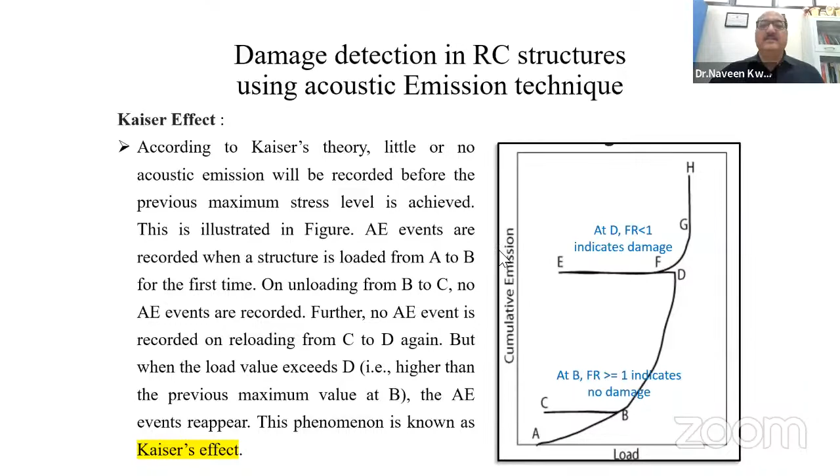So if we talk about wind loading, earthquake loading, all loading which is cyclic in nature, from that point of view this Kaiser effect is very important. It says that little or no acoustic emission will be recorded before the previous maximum stress level is reached. So the signal will be received only if the damage is more than the previous activity, or you can say a hit will be recorded only when the present hit has more energy than the previous one. So the Kaiser effect is very important for the analysis or processing of the data.

And then we define a very important parameter, the felicity ratio, from the monitoring point of view. The felicity ratio is defined as the level of damage as a ratio of the load at the onset of AE activity to the previous maximum load value. Based upon that, if the felicity ratio is less than 1, it indicates damage, and if it is greater than 1, it indicates no damage.

So now I'm going to present the monitoring of plain and RCC beams and steel fiber reinforced beams, for which the monitoring has been done with the acoustic emission technique.

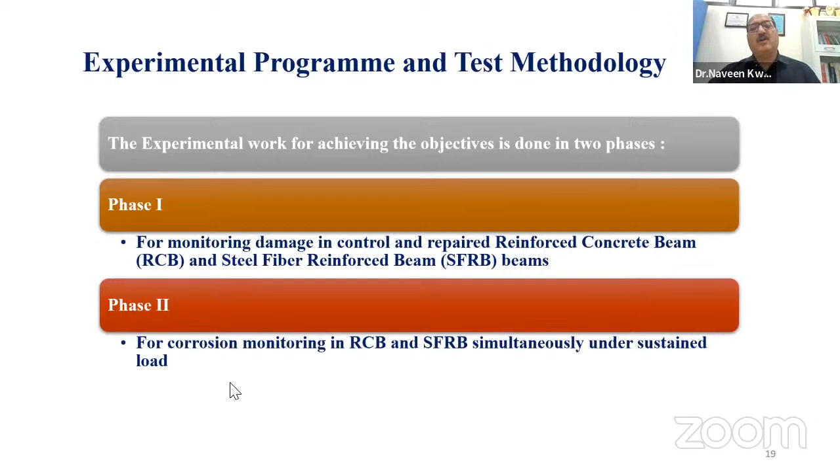So for that, we performed an experimental program in our labs, particularly for monitoring damage in control and repaired reinforced concrete beams and steel fiber concrete beams. So we have used two types of beams, reinforced concrete beams and steel fiber reinforced beams. And in the second phase, we did the corrosion monitoring of these beams, also with the acoustic emission technique.

So for that, we created beams of cross section 127 by 227 mm and 4100 mm long, almost 4 meter long beams. Then we used three mix grades, M20, M30, and M40, and flexure tests in both RC and SFRC up to 90% along with AE monitoring have been done. Once the beam was damaged to the 90% level, it was repaired with GFRP wraps, and then we again repeated the flexure testing along with the acoustic emission technique.

So basically, we gave damage to the beam, and as the beam was damaging, at the same time we monitored the acoustic emission signal variations, and then we tried to show, based upon the damage that has developed, how the AE parameters are varying. To monitor the AE parameters, acoustic emission hits and acoustic emission energy have been noted down.

And based upon this analysis, we try to give an equation by which, if you want to monitor a beam in real time, you simply put a sensor over there and keep recording the AE hits and the AE energy. And from the AE hits and AE energy, you can find out the damage that has occurred in the structure. So this is the L section and cross section of the beam.

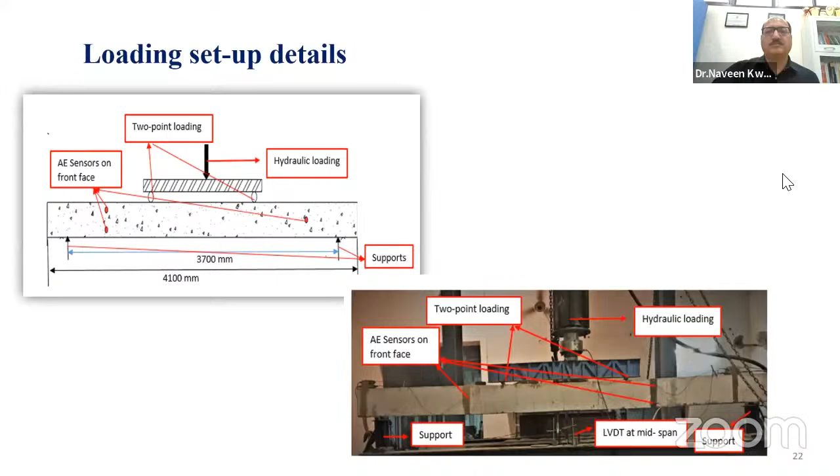So I'll move further. This is the way the beams have been tested. You can see here the locations where AE sensors have been placed. This is the way the beam has been loaded with two-point loading. Basically we have done a load control test. We applied the load up to 5 kN, then brought it to 0, and kept increasing the load till there is failure in the beam. An increment of 5 kN is given at each loading cycle.

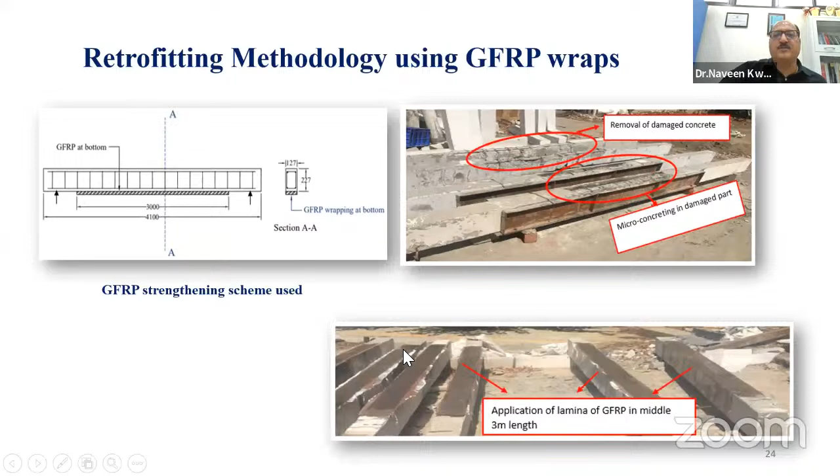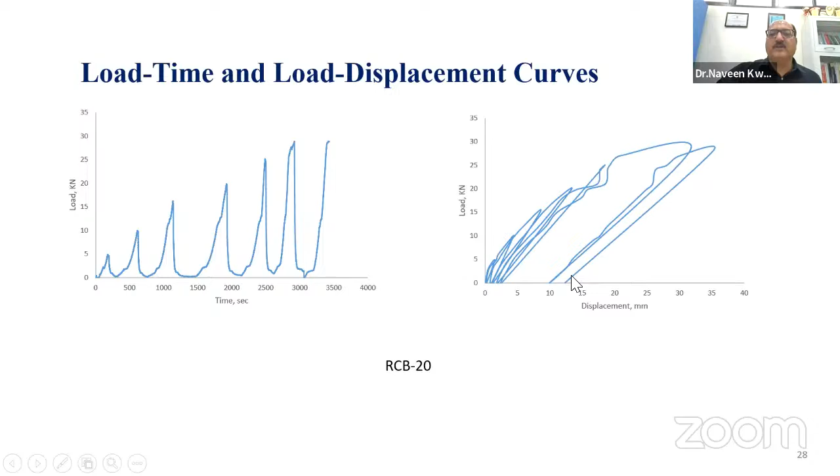So it basically refers to the Kaiser effect also, because the hits will be only there when the energy is more than the previous activity that we have recorded earlier.

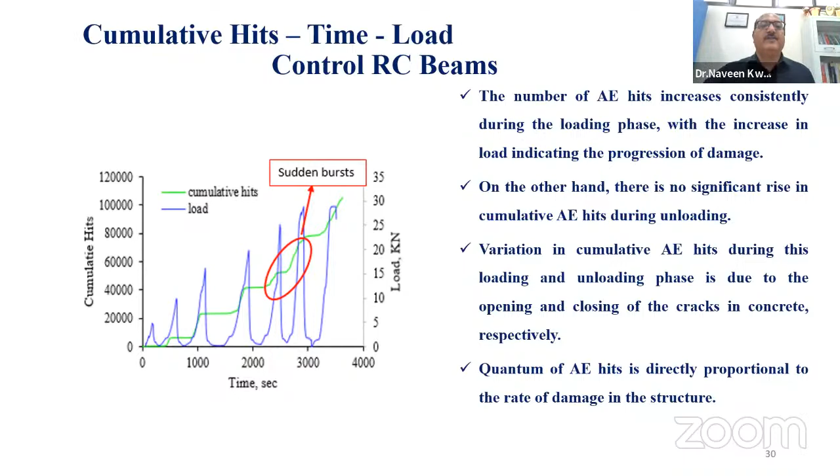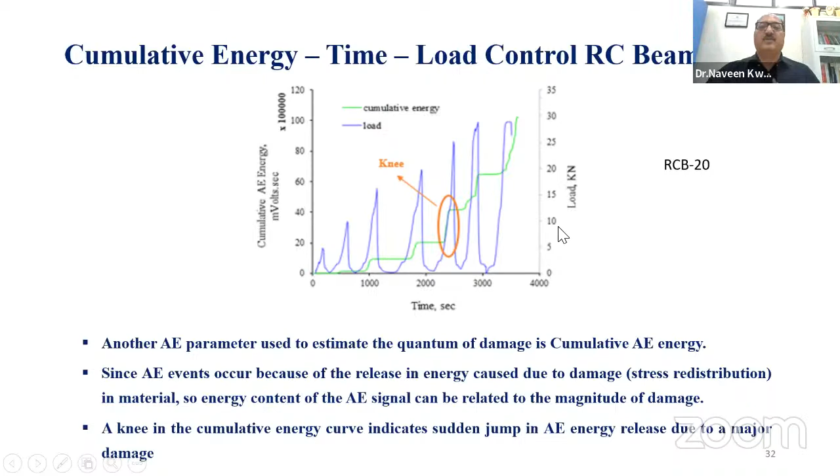Now this is the variation of the AE energy. You can see here on the left y-axis, we have put the cumulative AE energy, whereas again the blue is the load cycle, and on the right side we have shown the load with the time. So you can see here how the cumulative AE energy is changing with the increase in the time. For each loading cycle, the energy is increasing.

Then the horizontal plot basically represents the unloading stage. So in the non-linear zone, particularly when the damage is more, you can see that there's a straightforward increase in the cumulative energy as well. You can see here also there's an increase in the AE energy as we keep on increasing the load.

Excuse me, Dr. Naveen, we are running out of time. Yeah, I'm just with this. I'm coming to the conclusion of this part. Yeah, I ask you to please conclude in a minute.

Yeah, sure. So based upon this, we try to evaluate the damage index also. The damage index is evaluated, and you can see here the minor damage, moderate damage, and the major damage has been plotted, like P by P max, then AE energy. So it's a plot between the AE energy and P max. It simply shows how the damage index can be evaluated for a beam particularly.

Again, for the other cases also, this has been evaluated, and particularly for the damage index, we can say that when the DI is up to 0.5, there is a linear increase in acoustic energy; from 0.5 to 0.8, we can say there is moderate damage; and beyond 0.8, there is an exponential increase in energy. So the damage index gives a clear picture of the damage that has occurred in the beam and how the energy is changing.

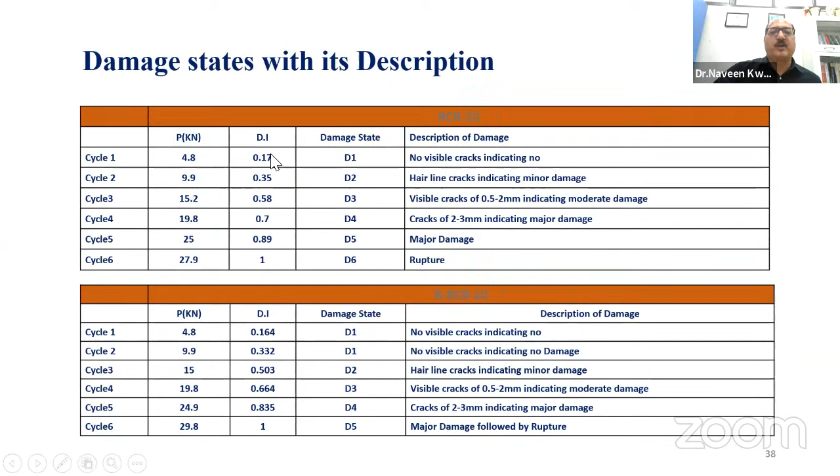So this is again a damage index calculation, and how the damage index is changing from the undamaged to the damaged state. You can see here various descriptions have been made based upon that.

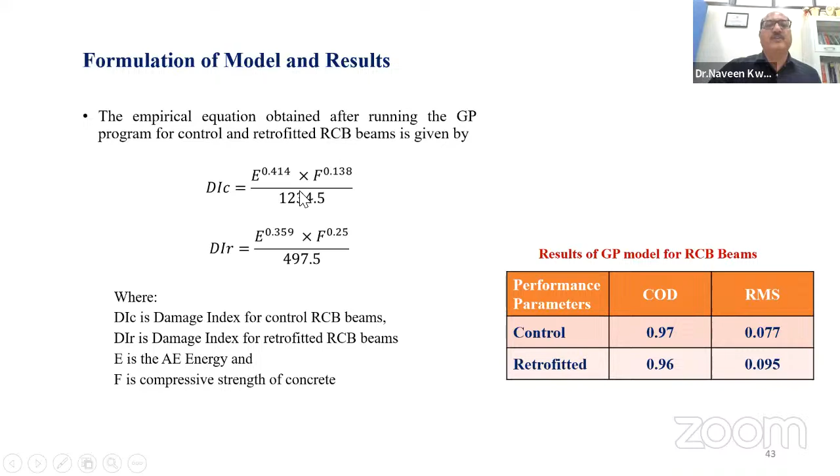So we tried to develop an equation using a genetic programming model to evaluate the damage index. This is the equation for a general user: the damage index is governed by the AE energy, and f is the compressive strength of the concrete. So if you have put the sensor on the beam and you have got some energy content from that, then you can use this expression for evaluating the damage index. These expressions are very useful for evaluating the damage index. And this is the way it has been plotted.

So there's again one exercise we did for the corrosion, which I will not cover because we are running out of time. So I'll just come to the conclusion part, and I'll say that this is a very good exercise which we can use for damage monitoring, and the AE technique is very effective for the continuous monitoring of the structure. Though it's a little bit expensive, it's very useful for continuous monitoring.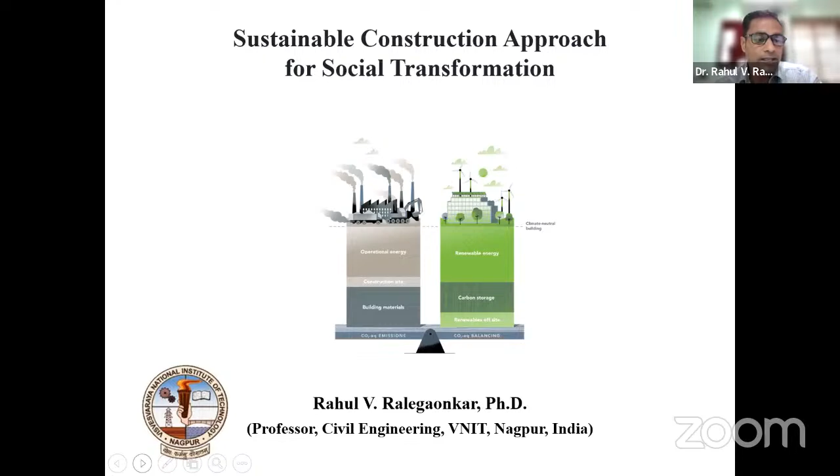I'll be focusing more on the sustainable construction approach for social transformation, as we are all technocrats providing solutions to the end users. We need to see that for socially deprived communities, if we can do something better during our tenure as professionals, it will be a great help to the nation. That is the humble mindset the national mission projects are focusing on under the leadership of Honorable Prime Minister Shri Narendra Modi Ji.

Hopefully everyone knows what all the SDG goals are, but primarily when we start focusing on sustainable development goals, although there are 17 enlisted SDGs, we primarily focus on SDG 9, SDG 11, and SDG 12, which focus on industry, innovation and infrastructure, sustainable cities and communities, and responsible consumption and production, when we primarily work on novel products pertaining to the solid materials I'm talking about related with the construction industry.

So I have already given you an idea of why the government is looking forward to these SDGs. And again, the question remains, what are the challenges and what are the opportunities for us as civil engineers to provide service to the nation. So primarily, as I said, under PM Awas Yojana, there are a lot of technologies, but one of the technologies we are focusing on is the incubation support we have got from the Ministry of Housing, wherein prefabrication is pitched to the ministry, and right now it is being promoted in some parts of our nation.

Later, under Unnat Bharat Abhiyan, as we all know, we need to focus more on cost-effective technologies, rapid building technology which can be used for making toilet units. Even for the urban sectors, we are focusing on security guard rooms. So these are various cases, and we know that when we talk about concrete, concrete has a lot of quality checks in the industry, especially when we talk about RMC.

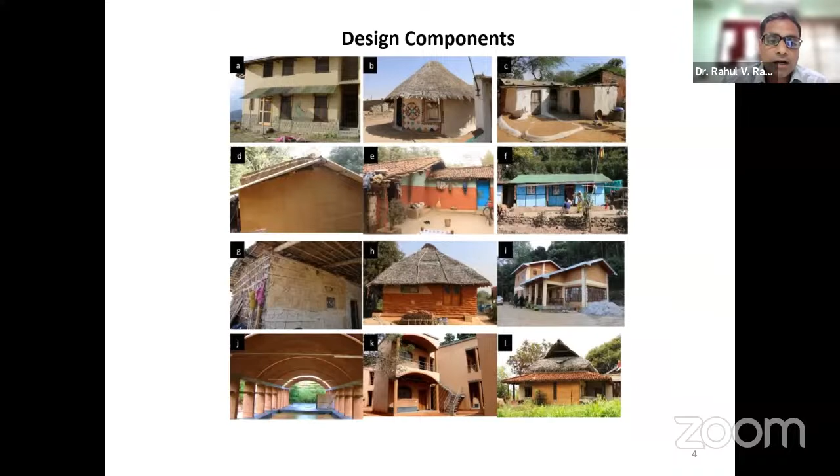If we do some analysis, hopefully the aspect of sustainability can be pitched in for those construction techniques. When we move around the local region, in India we have a lot of waste being generated, and a lot of researchers are doing a huge amount of work focusing on utilization of this waste. But my primary concern is, can we really transform the industries who are manufacturing products using conventional aids? We all know that fly ash based products are very popular now, but over and above fly ash based products, the area we have been focusing on for over a decade is utilization of agro-industrial waste or ashes.

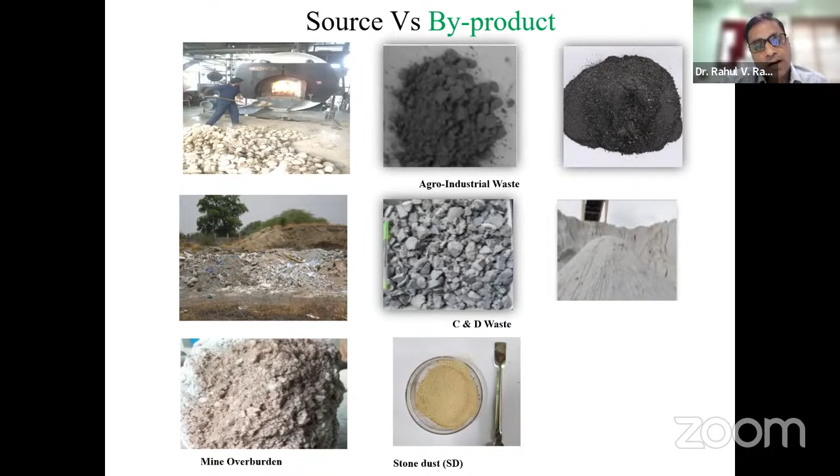These are some of the names I have put here, and their generation goes into millions of tons of waste, over and above C&D waste, which is again a primary concern for all innovators and manufacturers. When we interact with the industries, because we are providing solutions to industries at a local level, we got to know that most of these MSMEs and small scale industries are generating a huge amount of waste and following malpractices. That is, they are dumping the waste in some part of the city or the outskirts of the city, which is again a solid waste management challenge in front of civil engineers.

So when it comes to product design, we need to hit three targets. Economically, my product should be compatible with commercially available products. When we design a product, we need to check its ecological footprint, and the last aspect we need to focus on is whether society can use these kinds of novel products. When we club all three, that is ecology, economy, and societal acceptance, we can call it a sustainable goal, where we can bring in social transformation with the help of the novel products we pitch to society.

Over and above, there are other aspects, but due to the time constraint, I'll restrict myself to the primary concept, and maybe at the end we can have a 4 to 5 minute discussion if it is apt.

Now, when we talk about sustainable technologies, we designed a framework wherein most researchers try to find alternates, either alternates to the binders or alternates to the aggregates. And when we talk about solid waste management, you will have the bifurcation into industrial and agricultural waste. Most of this waste will be in some particle form, which you try to use as a fine aggregate substitute or a coarse aggregate substitute.

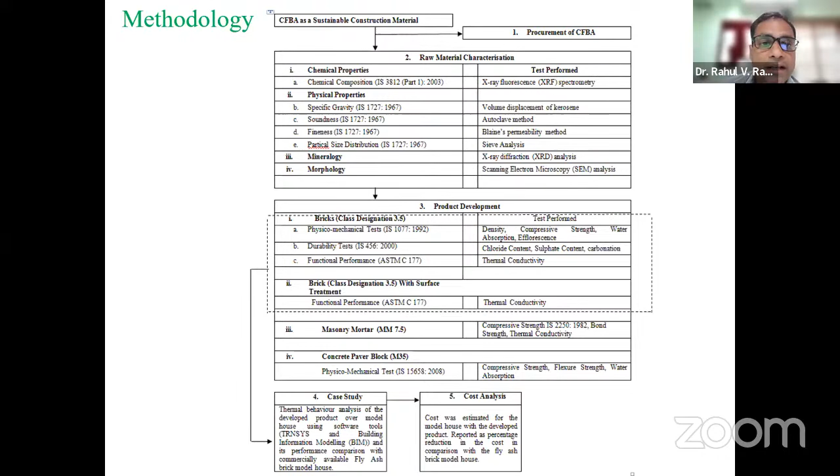So there are set methodologies for how you categorize or check the feasibility of raw materials. Once the raw materials are put in for some mix design for a specific grade of any particular product, then you have a lot of codal provisions which need to be complied with, based on physical, mechanical, structural, and functional performance of those products.

So it's a manufacturing unit where you can have a number of products. It is a fully automated plant what we have, and we try to primarily focus on the various wastes which are available in and around our city.

So as the definition of sustainability teaches us, you have to have a buffer zone of around 50 kilometers in and around the region where you are working. So primarily sustainability means: think globally but act locally.

So we try to give solutions to various small scale and medium scale industries who are not purely using coal, but there are alternate fuels being pitched into their industries for meeting their boiler requirements, and the secondary sources which are all coming out of those wastes. We try to check whether that particular product is feasible or not based on its microscopic analysis.

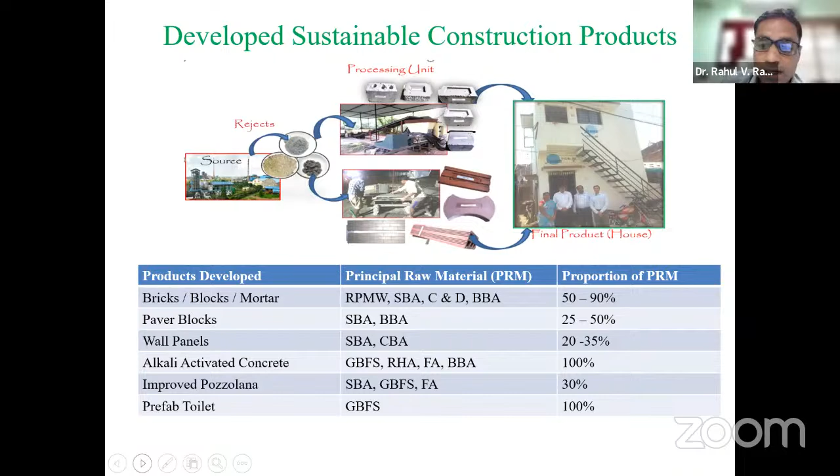Next, the costing aspect. Commercially, when we go for manufacturing these particular products, the cost goes down because the commercially available materials are substituted with waste material - or rather than waste, I should say byproduct.

So as a small step, we asked: can we demonstrate these technologies? We used a small scale modeling technique initially. We started making these products open to society, keeping them in the open air just to check their performance - how they perform - and we got a lot of inputs from experts at national as well as international levels.

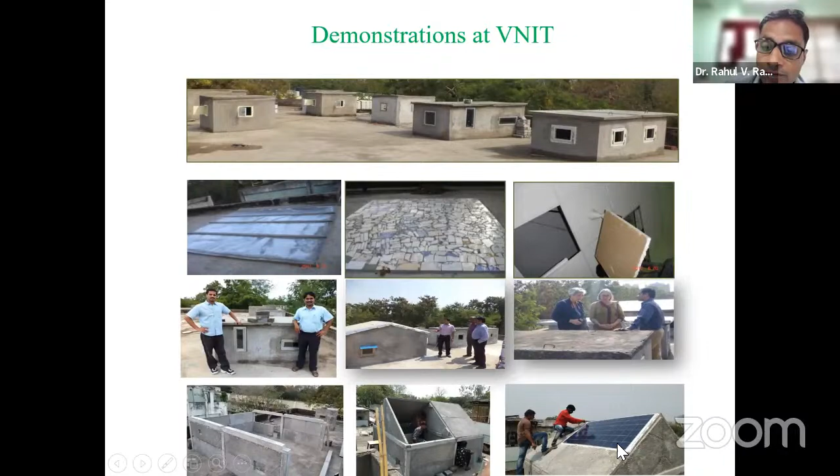And now we are coming to a decentralized approach. We are proposing - since this kind of housing is what we see in and around our city, not multi-story, too many big units - can we have products that generate energy at their own roof?

What I've described is an attempt at collaboration. We have been doing a lot of workshops with industry experts, and some industries have come forward to take up these societal issues or challenges. We have given them the technology - we've made blocks initially from bio-based ashes.

We have also given the solution in the Gadchiroli district, which is a Naxalite region. As I said, sustainability has to be pitched at a societal level. We convinced the Ministry of Environment and Forest, and almost 10 Naxalites who gave up their illegal activities came into this regular livelihood, where their families are now supported by manufacturing these bricks and blocks at their own units.

So this is one of the regions of Gadchiroli where we call it Vadsa. Further in Nagpur, we have one of the slums.

In the slums, with the help of the Ministry of BMTPC and Ministry of Housing, we have adopted one or two sample places and demonstrated these products in a society where a G+1 structure is constructed. We put sensors to monitor regular temperature over a year span, and compared this with a fly ash based product. It reduced dead load by 34% as it is lighter in weight, saved cost, and temperature was controlled to a level of 6%.

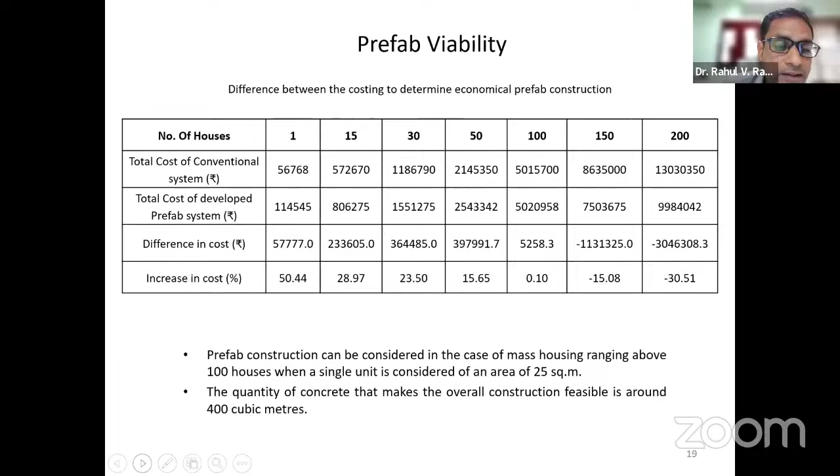We do a lot of analysis on whether this is really a feasible product. There were 18 combinations which we generated for a housing model. Based on that, we found that if the requirement or demand is more than 400 cubic meters, you can definitely go for these kinds of prefabricated structural units. Whether it's a small house or a number of housing units, if the quantity requirement is more than this, we can go for these lightweight concrete design products.

Can we take it further? We did a time study analysis where you can save almost 20% for a single unit. Then for experimental analysis, these are the physical sensors we put, generating data over a year. For the computational analysis, we get almost 8% temperature control, which is key since your cooling requirement can go down.

In the energy analysis, almost 50% of peak cooling demand has gone down. With the help of the developed prefab system, we also checked how much embodied energy we could control, which was 12%.

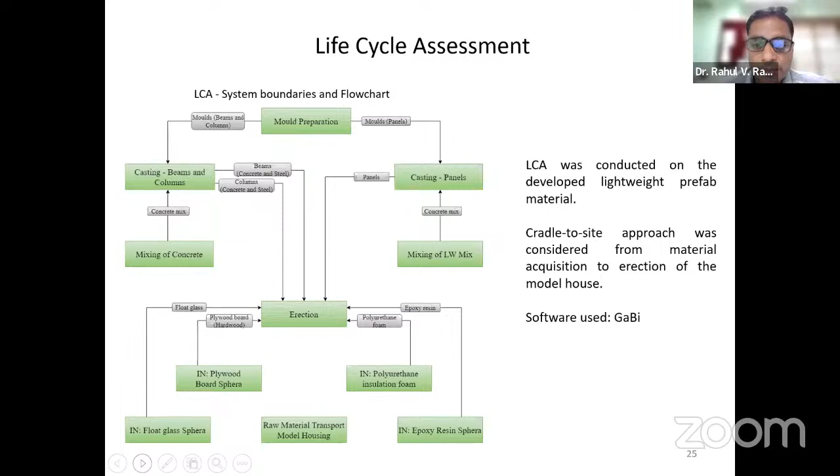This is one of the important aspects nowadays coming up in the civil engineering industry: how do you go for life cycle assessment of these kinds of novel products? Will they last, keeping in view the National Building Code requirement of a 50-year lifespan? When we did this analysis, we found that for these products, the acidification potential, eutrophication potential, global warming potential, and ozone layer depletion potential were much in control compared to the standards.

The key area, as a researcher, is how to transfer the technology from lab to field, which is again a major challenge, and how to generate the resources. But we have CSR, which is one of the major important aspects where we can definitely interact with the industries and they can help us out. On that particular concept, VNIT has taken a lot of efforts, and we are now collaborating with a lot of other agencies, and this is how it is going to help.

We have the standards which talk about green building designs, wherein we have now started moving into rural India, because there's a lot of innovation or facilitation required for upliftment of the rural society. So we follow the norms of green villages. We could successfully install these kinds of toilet units in just one and a half days. Even the security guard rooms which were required for some of the industries.

Again, if I talk about costing, this toilet unit costs somewhere around 12,000 rupees, where our municipal authority has given a sanction of a total of 16,000. We are not into commercial business. We just develop the technology and give it to the industry. Next, the security guard room's manufacturing doesn't cost more than 10 to 15,000. If we Google any security guard room, it costs around 45,000; the industry associated with us is selling it at 35,000 rupees. So that's it from my end.

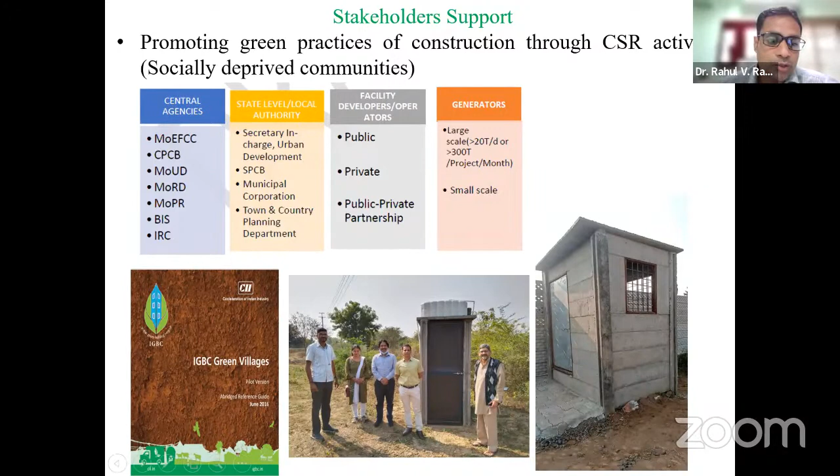From a sustainability point of view, I would like to highlight that we have to work on ecological footprints, the economic aspect, and the societal acceptance of the novel products which we wish to pitch in society. Our future depends not on what will happen to us, but on what we decide to become. Thank you one and all for patient listening, and I would like to interact more if there are any questions. Thank you.

Over to you, session chair. Thank you. Any questions for Rahul? I just had one question, Dr. Rahul. Are you taking up this project in all the states or only in the vicinity?

No. As I said, we are working with the help of 3 other institutions. CBRI is in UP, so in UP they are identifying their own ashes. For us, we are primarily focusing on bio-based products. The third institution is NEIST Jorhat, where they have a lot of bamboo. So there's bamboo waste, then bagasse, or what people nowadays call parali, and in Nagpur we have a lot of cotton waste. So we are giving solutions for agro-based products.